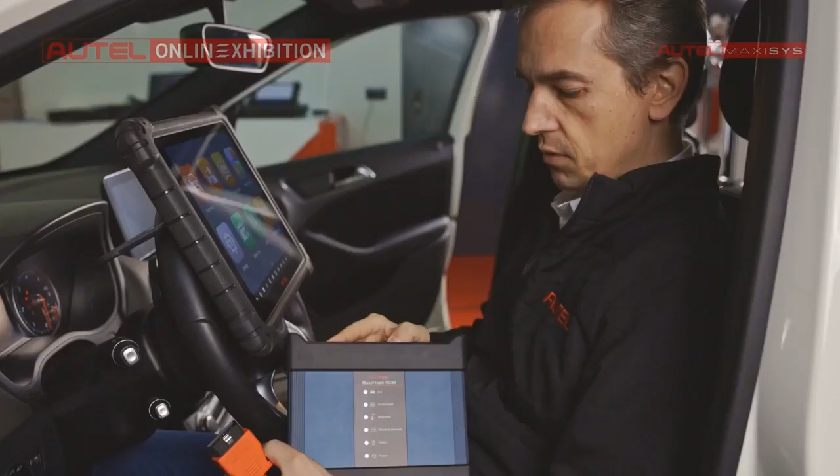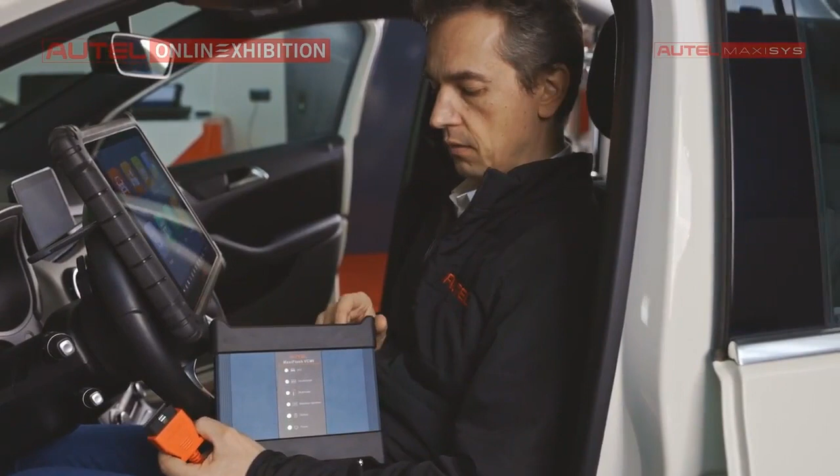Right now I will switch on the tool because it has its own battery built in, so in this case we will be able to start the software inside. As you can see, there is a small beep signal, and right now we just have to wait a few seconds to start internal software of the tool. When the tool is ready, we will see green lights: first one, the tool is in operating mode, and then another one that the battery is fully charged. So at the moment we can start.

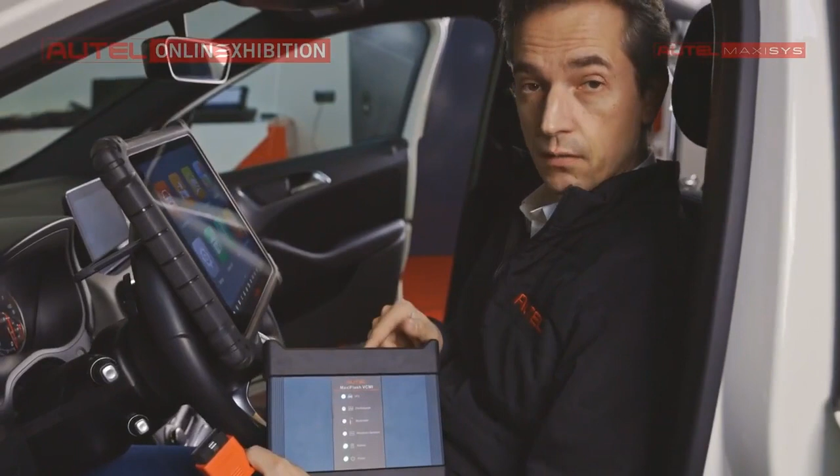This beep was done because our interface has already been connected with our tablet, so it is ready to work. Let's connect it to the car, and let's have a look how the diagnostics look like here.

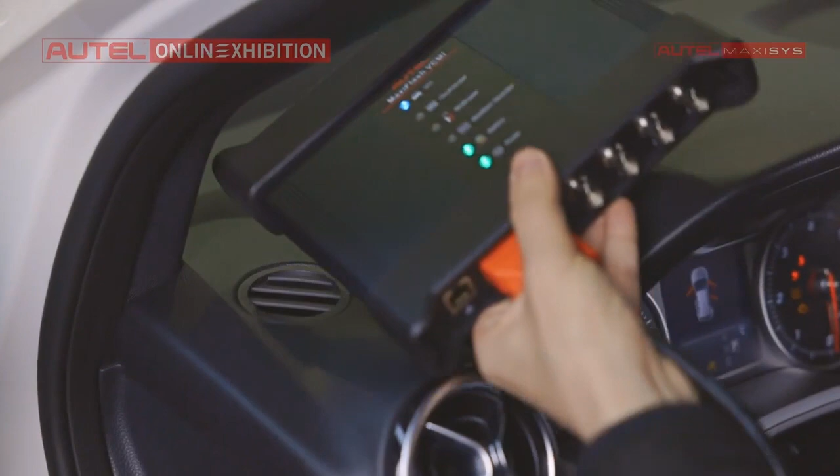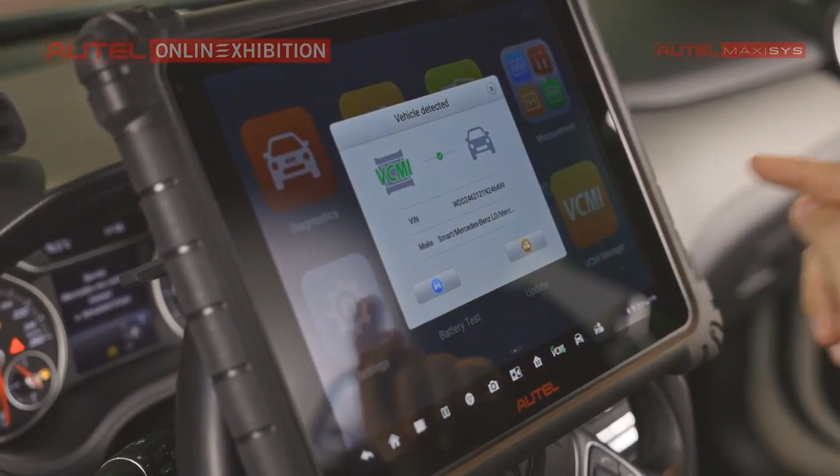Take a look, we have just connected the interface to the car only, and the software has discovered that we are connected. We even got the VIN number, and from here we can enter the diagnostics just by pressing this icon.

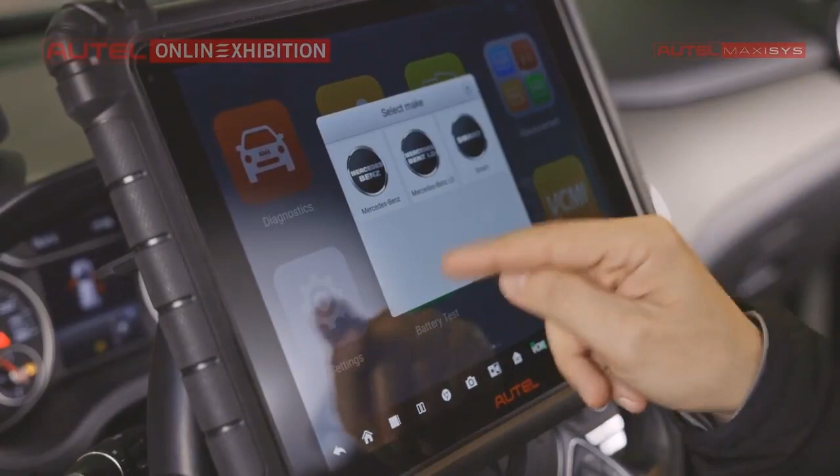Right now we will perform the standalone diagnostics as it was before, so I will select it right here and confirm with OK. We have already read the VIN number, so confirming our selection, I will click OK and the car will be selected automatically. Here we have something like a summary of the car, and right now we can access the diagnostics just by clicking OK.

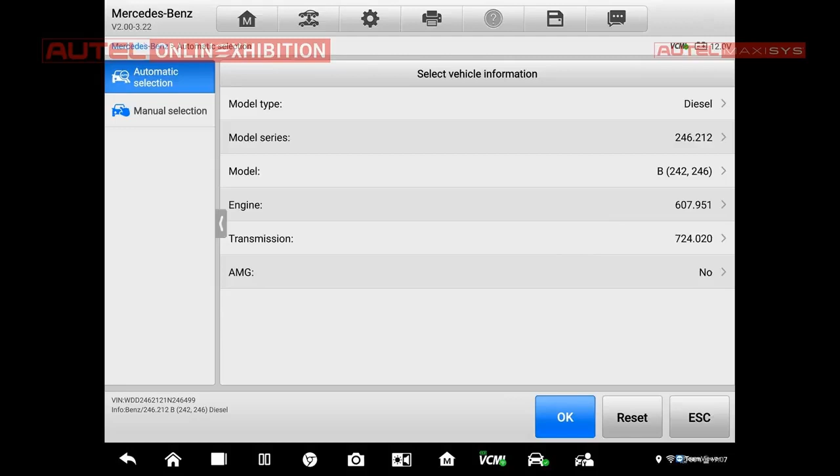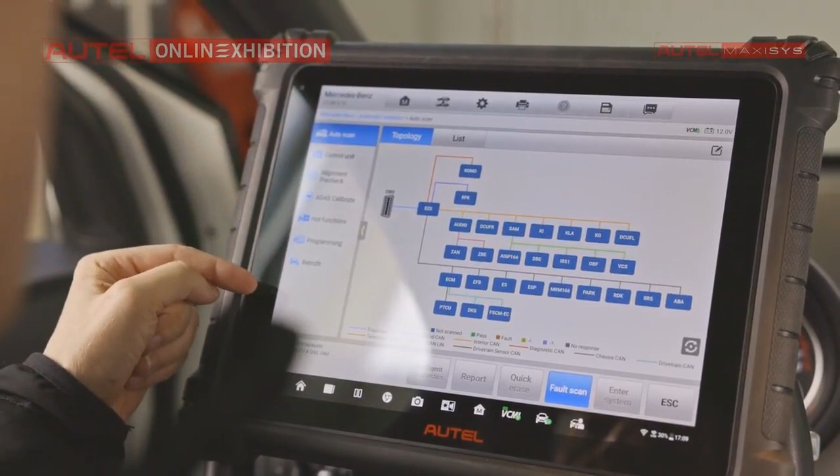We have selected the car and we are almost ready to make a diagnostics. What is the main difference? Take a look, in the left part of the screen we have selections. What can we do? For example AutoSCAN, control unit, alignment pre-check, ADAS calibrate, hot functions, programming and retrofit.

So if we cut these two options, alignment pre-check and ADAS calibration, we will get exactly the same menu as we had in the 909.

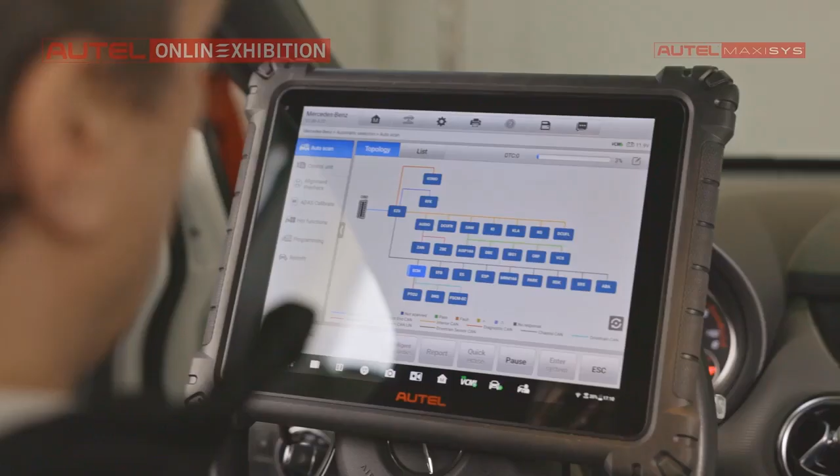Right now we can perform a full scan, so I will press the icon only and we will be able to see the process. It will look exactly the same as we have seen before, so there won't be a bigger change. As you can see, the full scan has finished, and we have exactly the same information as we had before.

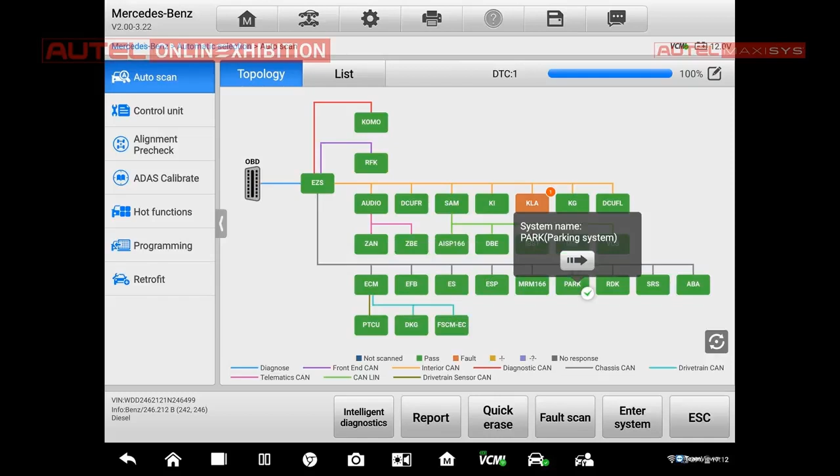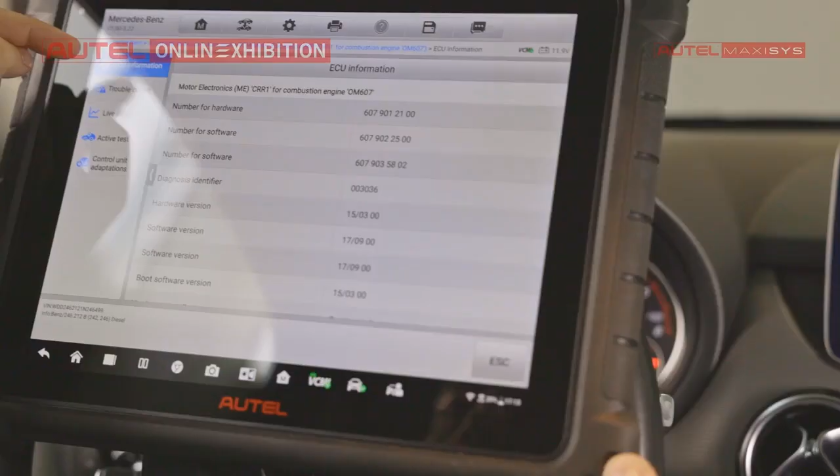We can select each module to get information about what it is, a list of components, so we can just scroll it down. Let's have a look even for the engine module. What is the difference? Right now we have all the options in the left part of the screen, and from here we can select the option we are interested in.

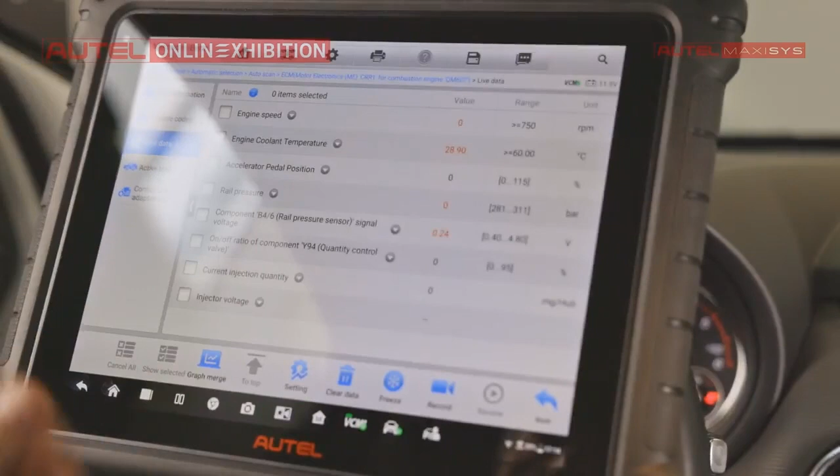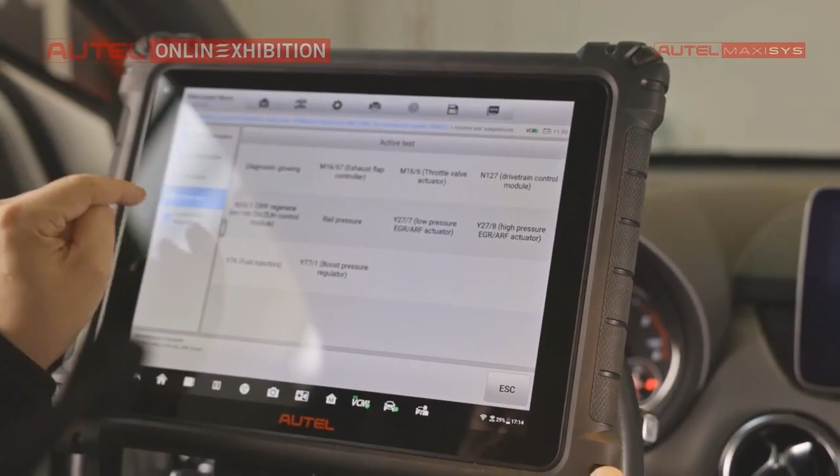Trouble codes, live data, for example engine speed, rail pressure, and here is the data. Active tests, so there are some active tests regarding, for example, the rail pressure, and control unit adaptations: configuration, programming, teaching process, and so on.

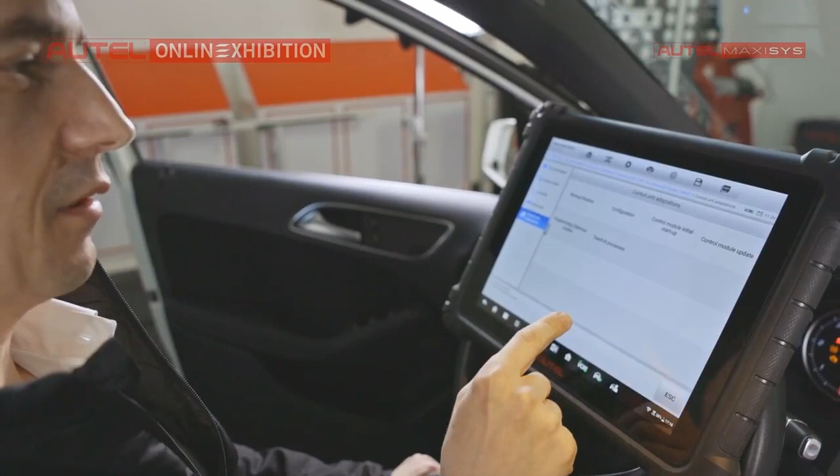Let's go back and let's have a look at what users like the most. I will exit the system at the moment, so let's summarize the diagnostics right now. It looks almost exactly the same as we had already seen in the 909. Yeah, so there are some differences in the menu, but not too much, right? Every mechanic can understand what is going on right here.

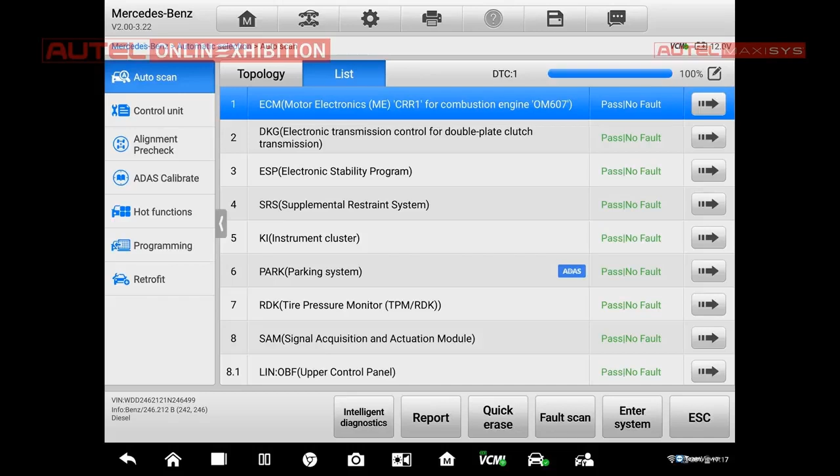But there are some additional functions that are not present in the 909, so let's have a look. I will just exit the diagnostics and show you immediately. So we are in the principal menu. What are the icons?

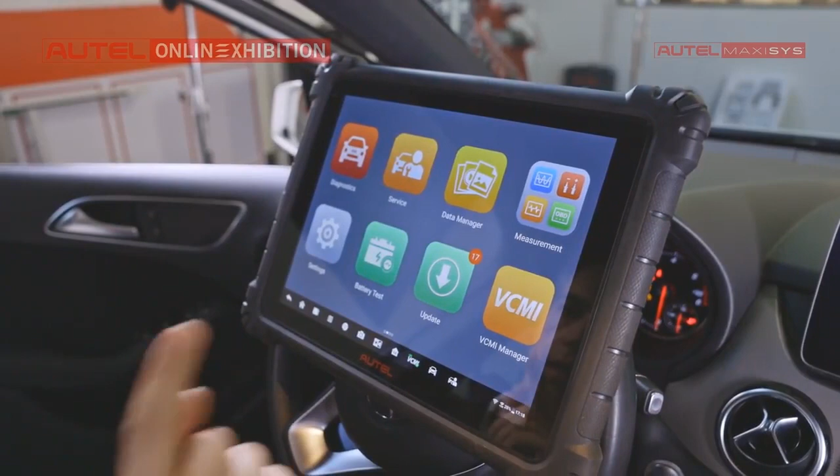There is a battery test, so it is exactly the same option like I told you before, but there is another thing, measurement, because we are using another philosophy, another instrument. So let's take a look. I'm going in.

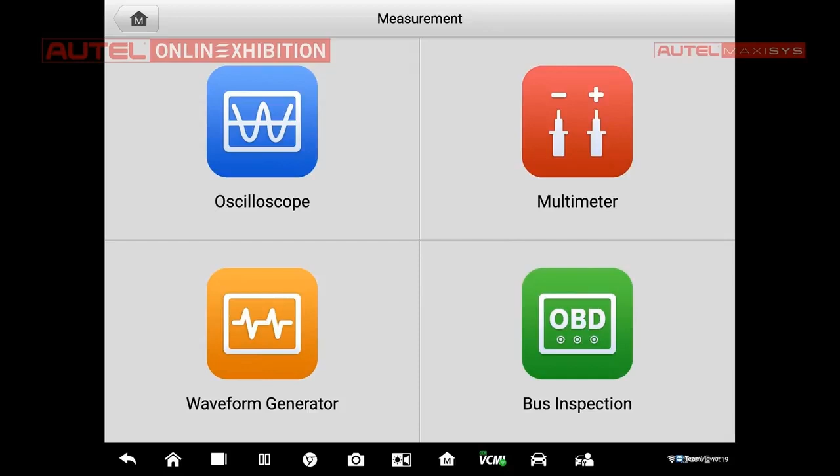Right now we can focus on 4 different options. First of all, we have an oscilloscope. Another thing is a multimeter. Another thing is a waveform generator and a bus inspection.

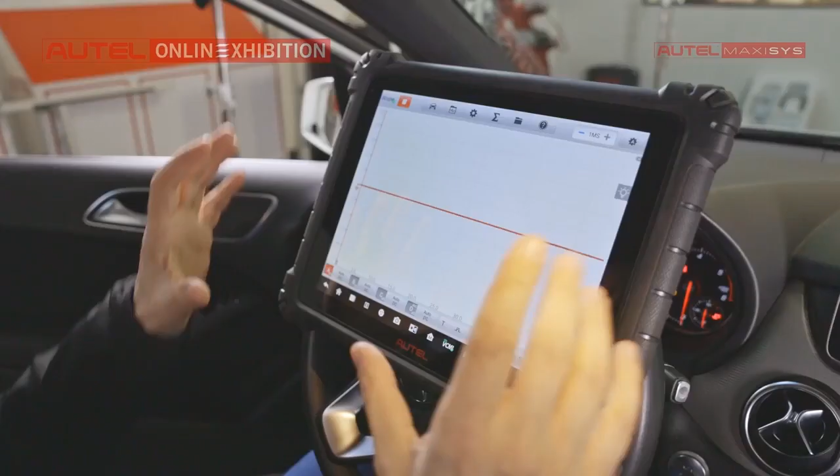So we will start with an oscilloscope and I will launch it. In the signal right now it's close to the ground, so we can see only the noise of them. But here are the most useful functions such as time base, and even we can change the base of the signal, so from the measurement from DC to AC, and even the division, so the voltage per division.

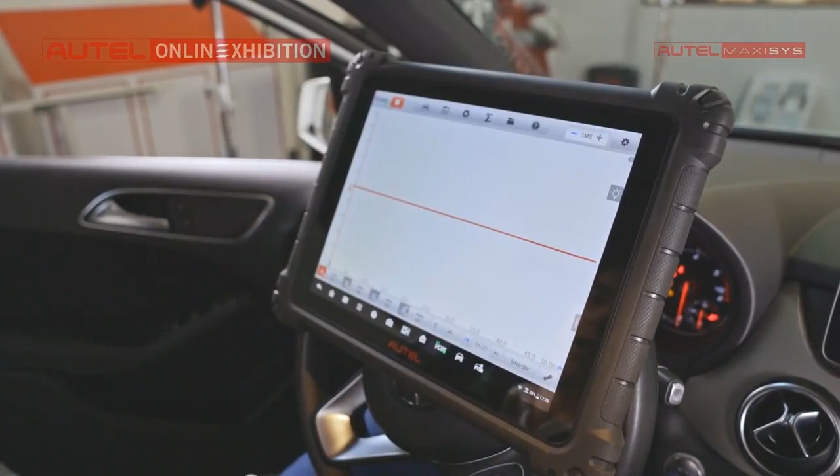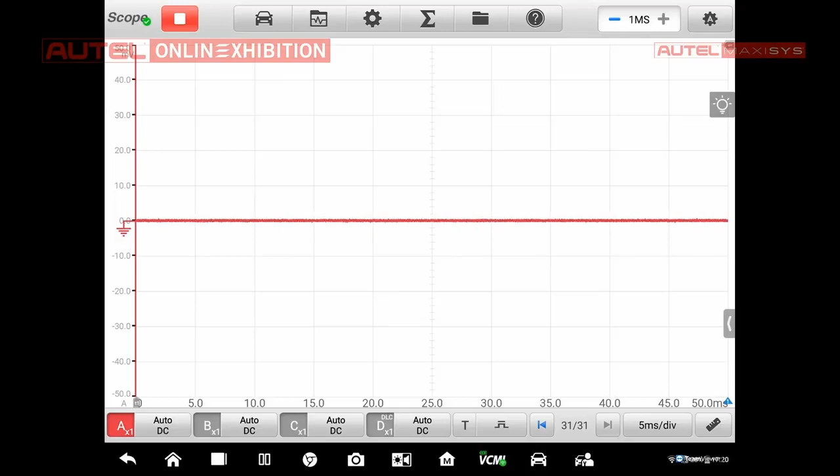This tool will be very appreciated for timing chain, for example, or signal drive for a compressor, for EGR, and so many things. Using this button we can select some additional information, some additional data, or what can be retrieved directly from the measurement.

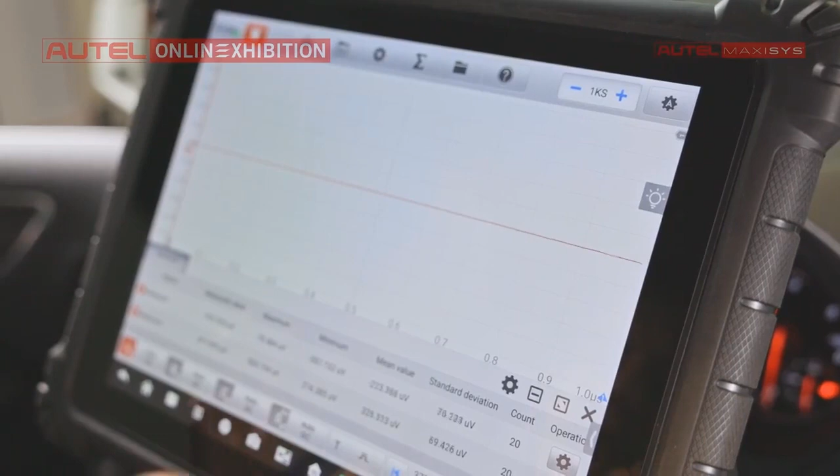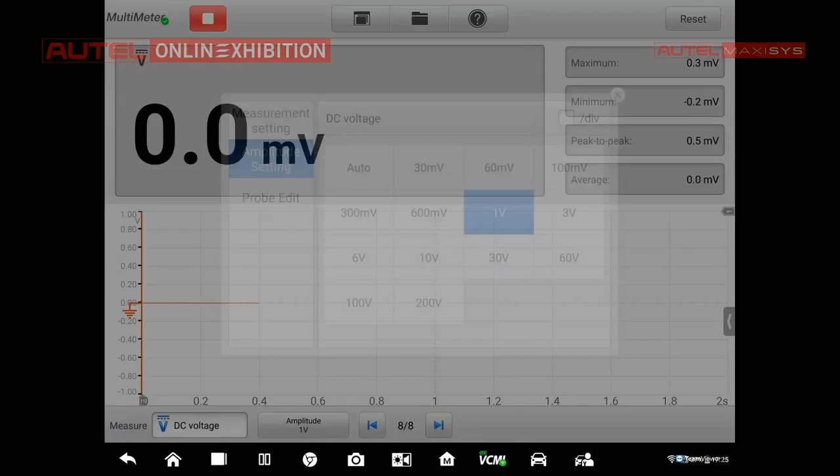I will show you the multimeter as well. Here we can change the range of our signal, right? And we can make the measurement as well. The trigger will be done automatically, so we don't have to specify current value. It is really easy to use.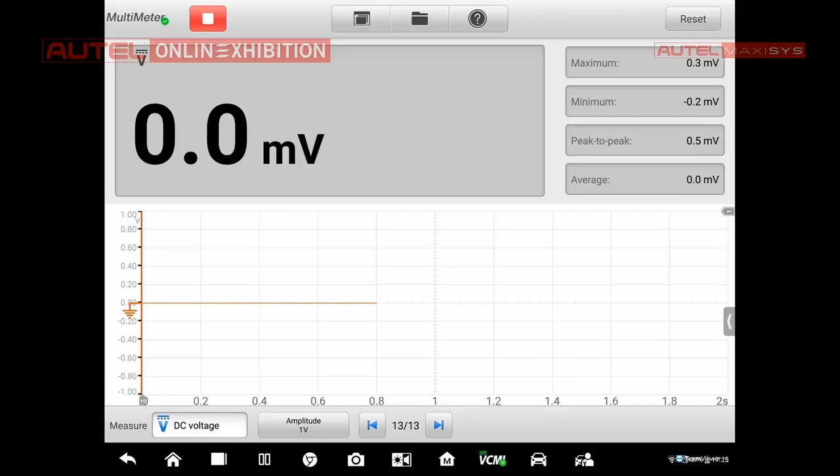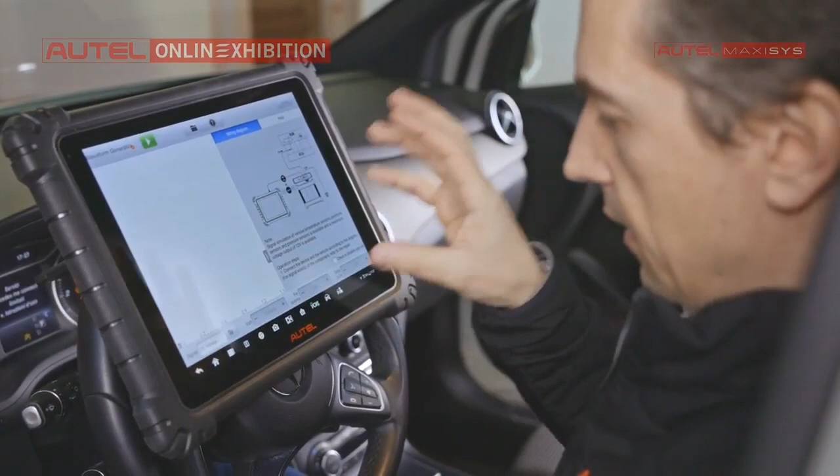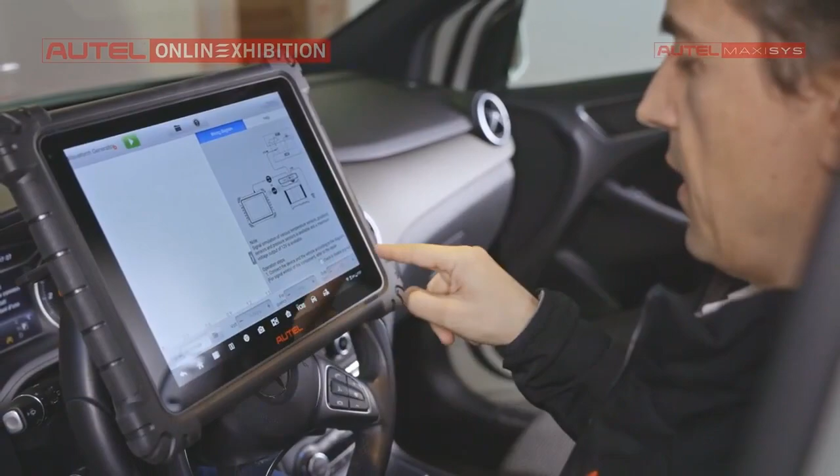Another option is a waveform generator. We can select it right now. Generally speaking, the signal generator can be used to produce the drive signal to some component. What is the most important thing? We have all features downstairs, so we can select DC or AC, the voltage of the signals, even there is a frequency of the signal and the duty cycle. So it is something like a simulation of the signal to drive the component.

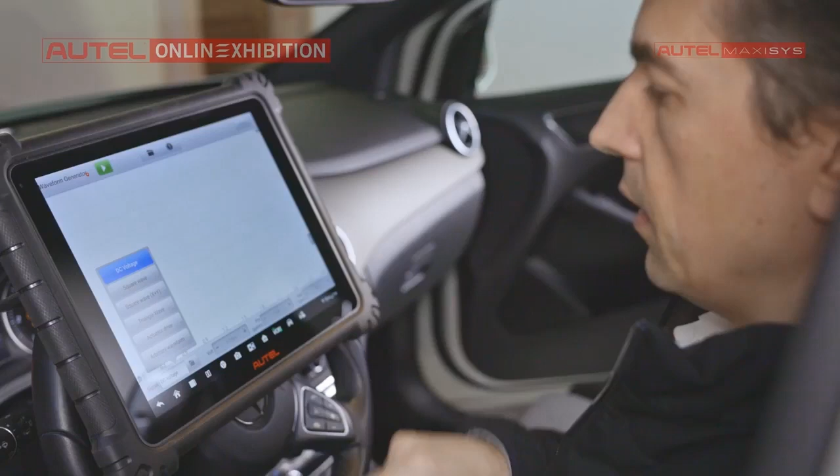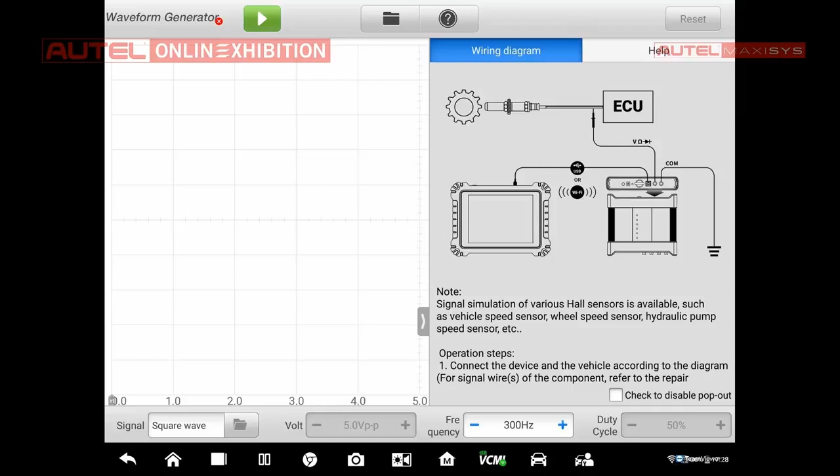Let's suppose that we want to power and try to make a diagnostics for an EGR. We can select square wave. We can select right here the frequency of the signal, where we will get this information from. In this way, I suggest to use the oscilloscope first, just to get the information, what is the tension and what is the frequency of the signal, and in this case we will be able to set it up right here. Right now I can switch on the generator, and as you can see here, the signal is already sent to the component.

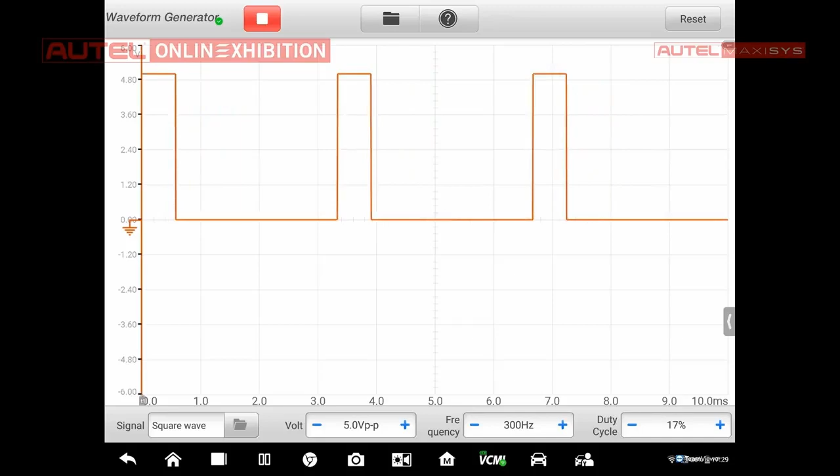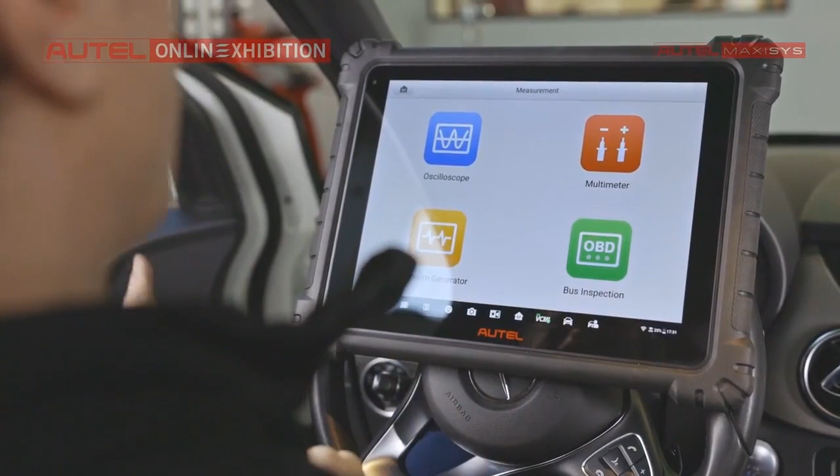Last function what I would like to show you is an OBD bus inspection. Let's suppose that we have just connected our interface and we cannot get the communication with any ECU. So what is the problem? We have no idea. Maybe there is a problem with the OBD socket. So let's have a look. We can select the function, and right now we can perform the test.

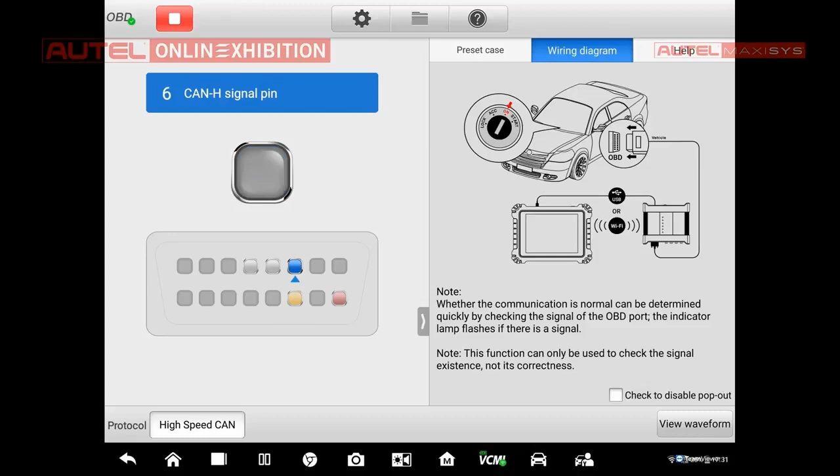We have selected high-speed CAN, and if these lamps are blinking, it means that there is a communication of both of the lines, CAN H and CAN L. So it means that there is a communication, and in this case that is not the problem of the CAN or the problem of the diagnostic socket. Here we can see the communication on the CAN, what is going on right now.

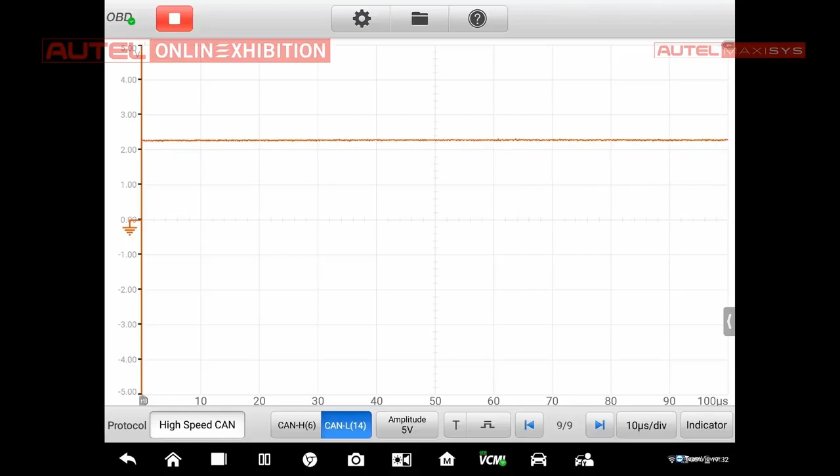We can switch to CAN L, and there is the same situation, so the communication is going on, and for sure the problem is not based on the OBD. Last thing what I would like to show you is a service option.

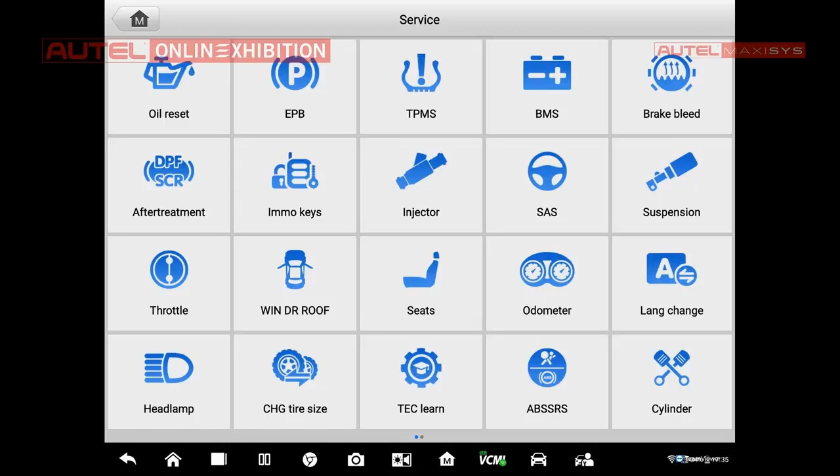So I will click it, and here are the most common functions what can be used in the maintenance. We don't have to know precisely where the specific function present is, but it is enough to select the function, and after the car, we will be guided through all this function to finish, for example, the inspection, oil change, and so on.